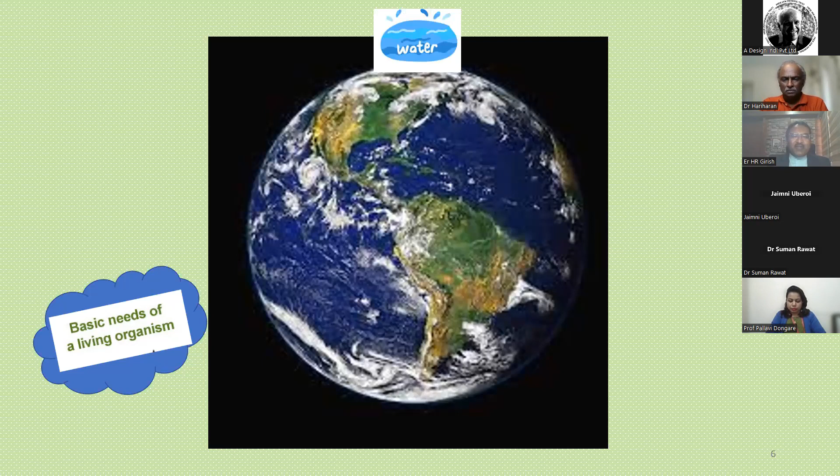And the very first thing on earth is water, sunlight, and then air. And then we have food which we require and the temperature. Now, if you look at all these things, these are not some very generic points that I'm making. Everything that we are doing today is having a humongous impact on every other thing. It may be on the temperature, it may be on the food, it may be on the air, it may be on the water. And when I say sunlight, the various layers above us in the atmosphere, it may be ozone, which we are very well familiar with, or other layers.

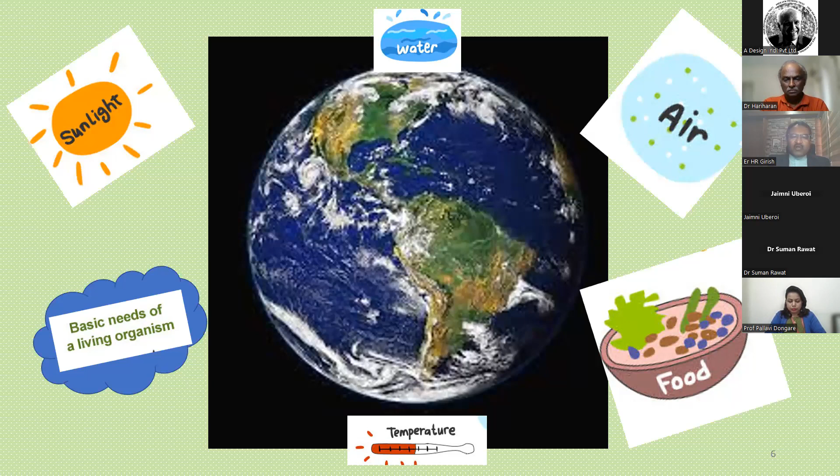So each and every aspect that made Earth what it is, and what made Earth so very possible to have life on it, is again the conditions where it is neither too hot nor too cold. It has water and air, and most importantly, it has got the right chemical composition, one of them being the carbon content. And then of course the magnetic field, which we are yet to deep dive into to the extent we have deep dived on the other three aspects.

So why we are talking of, again, not too hot and not too cold, or water and air, is today whatever distress that you're seeing all around us in the air, it may be triggering the COP, or it may be triggering the discussion on sustainability or going green, the eco-friendly method of construction. All this has already started impacting us.

And in fact, you will be really surprised to see youngsters being plagued by carcinogenic material, leading to, unfortunately, diseases or serious health hazards like cancer and things like that, which hitherto was never known in the last many centuries at that age group. Perhaps you ultimately start wondering whether all of these have got a very strong sutra, a chain, which is linked to one another. And therefore, we cannot keep looking at situations today in isolation. We have to be looking at it in a very holistic manner.

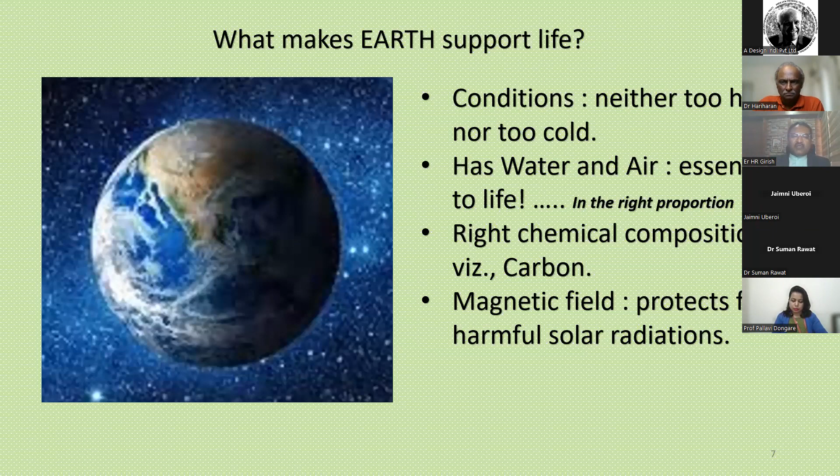So very holistic that you break far away from your professional or technological information or data that you have, into very micro nature aspects, such as the way of life, your thought process, your basic questions as to who are we, why are we. So these are not some philosophy, these are not some religious aspects. Everything is ordained in a particular manner, which is impacting today the life around us. And there are a lot of evidences which I'll show you of why this is happening.

And as I told you, it took billions of years and life began. But then I'll not be surprised with the rapid depletion of the quality of life threatening us. Even the basic fundamental requirements such as food and water and air are also becoming so very scarce.

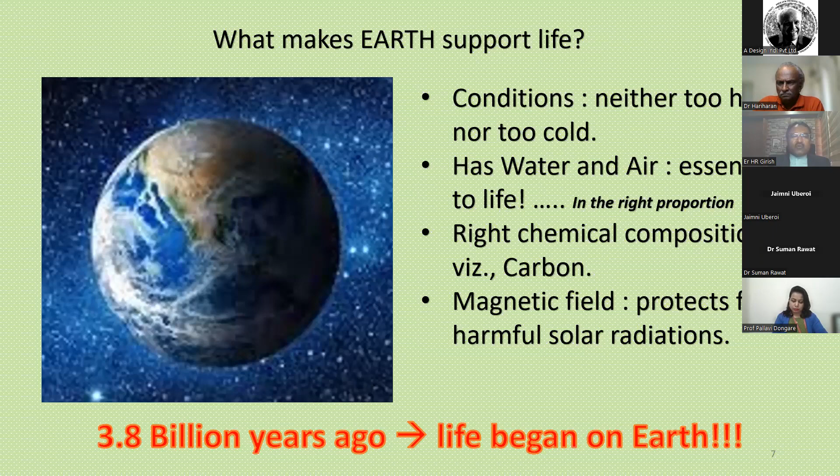Now, coming back very quickly, we all need to understand that it's not that Earth is like a huge sponge and it goes on absorbing whatever you do. Earth is extremely dynamic, extremely sensitive, and the most important aspects of our planet are that the atmosphere, the oceans, the ice and life are ever changing, changing by the hour, changing by the day, changing by the week.

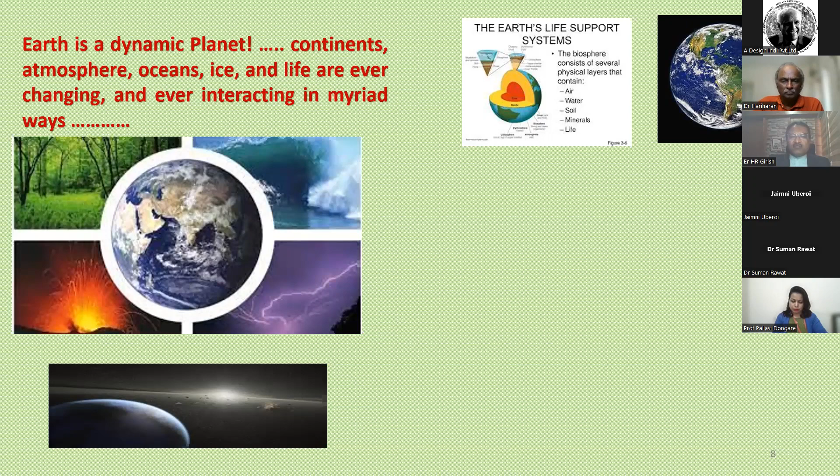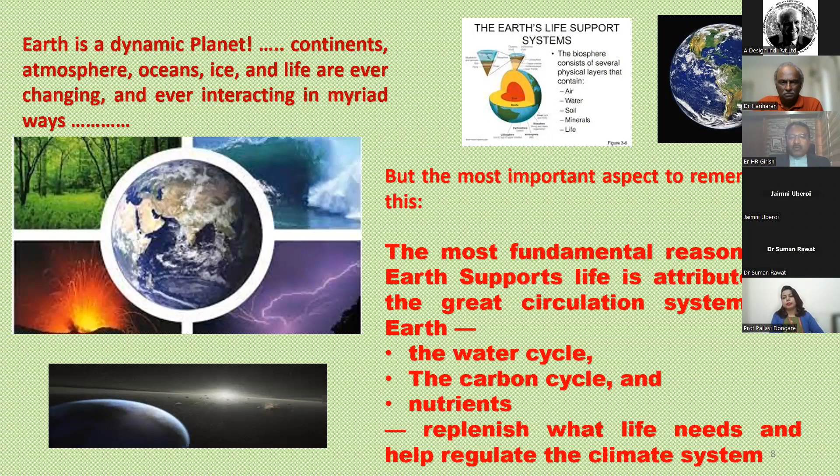And let's see why these are changing and how man-made things are adding to this further depletion. Now, the most important, as I told you, are the three cycles: the water cycle, the carbon cycle, and most importantly, how you go about to replenish life and help regulate the climate system.

If you go deep back, the concept of sustainability - what I keep doing in this particular talk is I keep toggling and drifting between various concepts, so kindly bear with me, but hold on to certain points which I say.

Even way back when you look up to the Indus Valley civilization, also known as the Harappan civilization - apart from the nostalgia and awe it creates, more closer to us as architects and engineers, the awe it creates is that this was such a holistically planned settlement. At the very prime importance that they started off, even before the concept was blooming, was the concept of sustainability.

And how do I say that? Because this civilization, as documented, we don't know how far it went or how long it existed. But today we have documented cases that this civilization lasted for about 5,000 to 7,000 years. But as we go across, new evidences are coming up that this civilization is perhaps multiple times older than what we think, and they lasted.

But how did they do that? How did they sustain themselves? That is very important. We need to do a lot of deep dive, a lot of research material yet to be discovered, and we need to draw parallels to what happened then - why did the civilization ultimately come to an end, or did it really come to an end? There is some missing link in the time clock of the world.

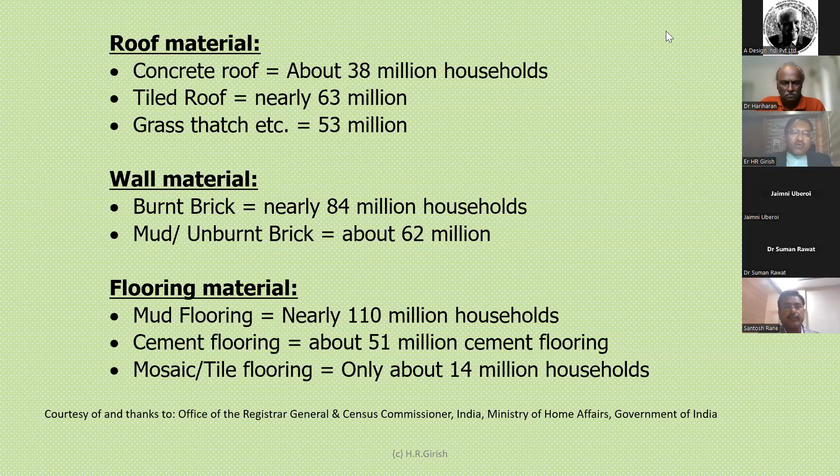And then the flooring material. The reason I'm trying to say that is, therefore, a whopping 97% are individual residences, and a huge percentage of that, again, is in rural areas. They are not in urban areas. So we need to go there.

Now, no contribution is too small, as I'm speaking. Let us all start thinking of the small things. As I told you, I'm not going to give you a ready-made formula and solution for everything. I'm just going to ignite the spark of inquisitiveness and innovativeness so that you have to take that further and pass on the baton to your next generation as well. So every drop of contribution matters in intent, in action, and leadership is very important, because leadership doesn't mind your designation. You're a general manager - it doesn't mind. Leadership is proactively taking responsibility and executing that and accomplishing the task.

That is leadership. For example, let us take a real life example of leadership where some great noble person came and started something very humbly. And that example is that of Dr. Prem Jain, who took over as the chairman of IGBC in 2007. And what was done in 2007? Just a minuscule 13 million square feet of green footprint. Just 10 years fast forward, he has been so very much in the front, in the lead, that he converted that into a whopping 5.7 billion square feet of green footprint.

Just imagine if one dedicated individual can do that. All of us collectively, all of us today in this world of technology, with so much information that we have, and with such a proactive environment, especially the government that we have, how much more we can go today, and therefore make that change and leave behind a legacy.

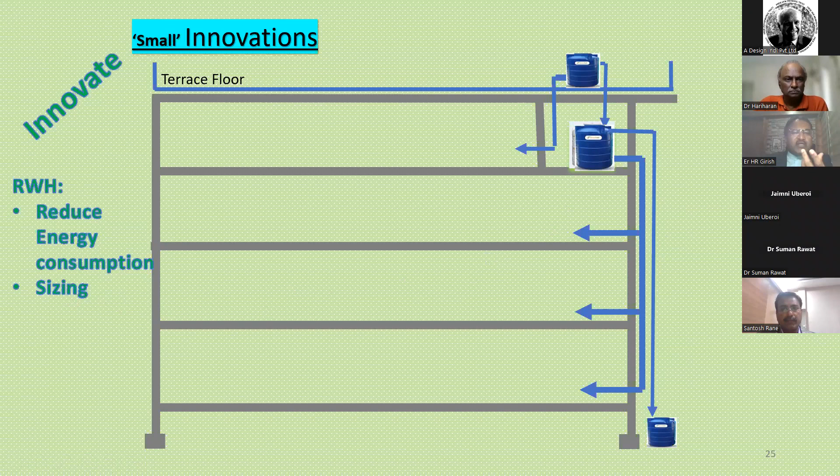You can create a small space of 5 feet by 5 feet - that's all it takes. But make sure you are structurally designing that. You should be very sure of that. I'll tell you why structural design by a professional is so very important.

Now, again, on the driveways, we keep talking of rainwater harvesting. Please use technology, please use porous concrete. And when I say porous concrete, I'm not just referring to cement concrete - it can be a myriad of concrete, recycled block, where they are not structurally a prime requirement. Please do not use prime material from the original source. Please reuse the material - for example, on your driveways, whatever waste you have, try to endeavor towards a zero waste project, zero waste site, so that it percolates down.

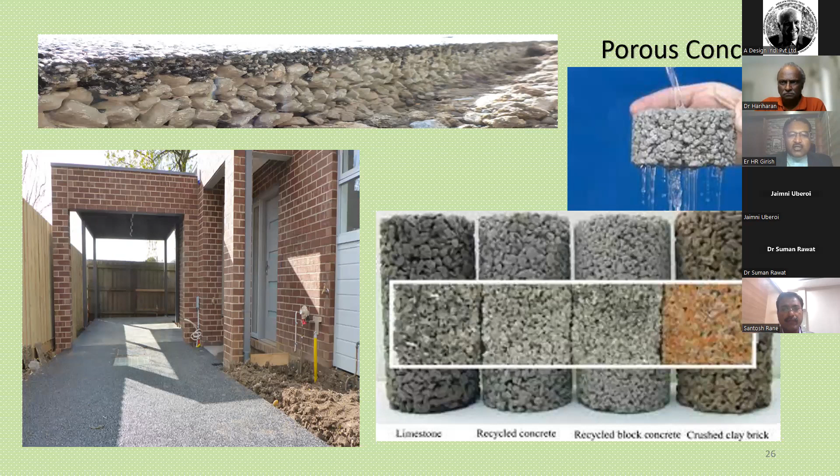And always think out of the box. That is very important. I'll give you another small example. There was a very brilliant young Indian engineer who worked on a NASA project where Neil Armstrong was sent. As you all know, one of the most critical life support equipment in a space capsule is the oxygen generator. But our brilliant young engineer from India placed a Sansevieria plant in the cabin for oxygen generation during orbit. He said this was our contribution to the first flight to the moon. Of course, he got awarded at the Minnesota University, and this is the plant.

And you know who this young engineer is who did this? Think of the very small thing - he is none other than the brilliant Dr. Prem Jain. He did that. The point I'm trying to make is don't look at him as just a legend - look at what he did, small things, just a small potted plant going there. This is where we need to think. We need to leverage that.

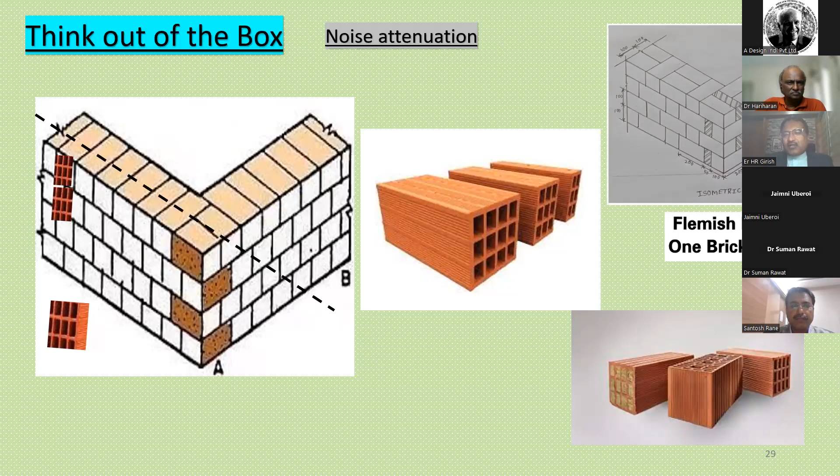Now, again, thinking out of the box and some points to ponder: the furniture, lean-to furniture or something, and try to use re-engineered wood. For example, this table that I'm sitting at does not have any legs because it's all folded. It's all foldable types. And I have purposely made my office in such a small place, though I could have afforded more, in order to experiment and see whether it will really work. And I'm really happy to say that it more than works, my productivity has gone up hugely because everything is within arm's reach.

Which means to say I've used less material. I've recycled the material. Even the table that I'm sitting at is not a table I have bought. In some apartment which I owned, I was redoing it. I had a lot of waste pieces of particle board, plywood and all. I never threw them away. I brought them, re-engineered them and did everything out of them. The point that I'm trying to say is that it's not so much about what I did.

It's so much about what we all can do. Lean-to furniture: take off the 2 legs and let the wall support it. Use hinges, let the wall support it, and let the other 2 legs be the support to it. And likewise, the smart movable wardrobes and storages.

There is a certain young smart couple who have moved into a plot. They have bought a plot, but they came back and told me, we do not want a big house. You know what they have done? They have just 3 capsules. One capsule is the kitchen. The other capsule is the bedroom. That's it. And then they've got a wash area, the toilet.

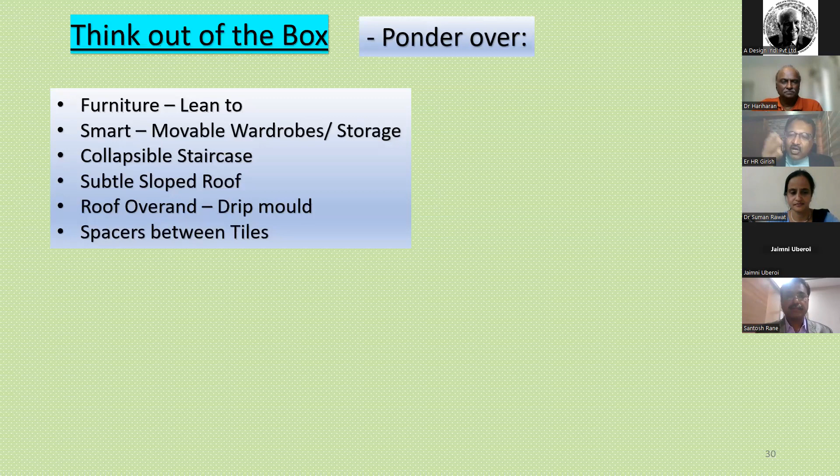And that's why please provide spacers. It will help you to inspect, and in case need be, you will not damage the tile. You will just remove that particular grout material and redo the grouting. Why should you not damage the tile? Because tile is extremely expensive from an environmental point of view. It is fired to such a high extent to get that gloss. It is mined from materials which are not occurring commonly. So these things are important.

So consider material of construction, recycled wood, steel, and the decking sheet also. In fact, I'm drawing a parallel so that you believe me: the roof of my house does not have 1 kilogram of reinforcement steel. It is just decking sheet. Normally the tensile stress is taken by the reinforcement steel, right? But here, the deck is taking the entire tensile stress.

And on that, I just went in for nominal weld mesh reinforcement, not for strength, just to arrest the shrinkage cracks. And it's all GGBS concrete. I've gone to the extent of 40% of cement being replaced by GGBS. And I am confident, and I could do it because I'm an engineer. It's like a doctor taking a drug that he knows works. Likewise, all of us should be that.

And most importantly, mindfulness is very important. Frugal, less is more, all those things converge on what? They converge on mindfulness. Solid waste generated, you can see, 11 billion tons. And every month, every week, we try to experiment on this. We do not get this readily in the market.

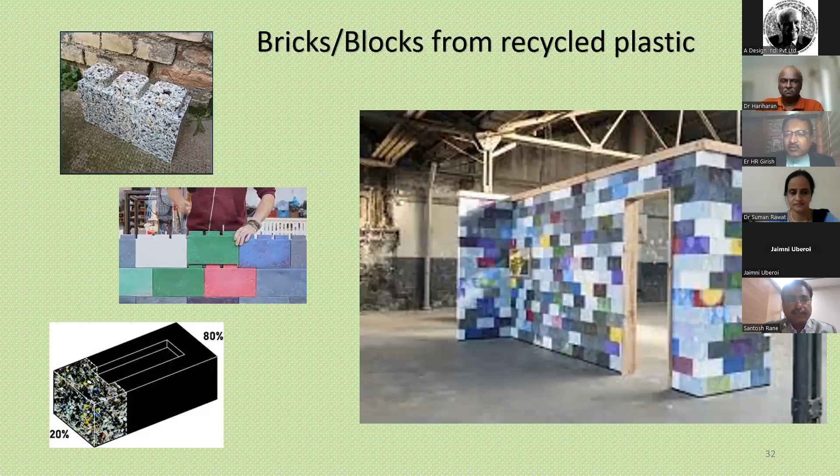And that's why I said in the first slide, all of us should be inventors, innovators, designers, and more importantly, applicators. If we don't do it, don't expect the vendor to come and give this. Don't expect the vendor to do it. Look at all this mass.

And urbanization is the major cause of sustainability being compromised. The more the people, the more compromise happens. That's where the population also should be reduced to the extent possible. All these places will now be converted, and it leads to a lot of greenhouse issues. And when we design, we need to be a little bit centric to the health of the people. Now I'll go a little bit more on to the sustainable alternatives.

Hariharan sir, how much more time do we have?

Another 3 to 5 minutes. Okay, then I have to rush. Fascinating, but time is a challenge. I'm sorry. Yes. Okay.

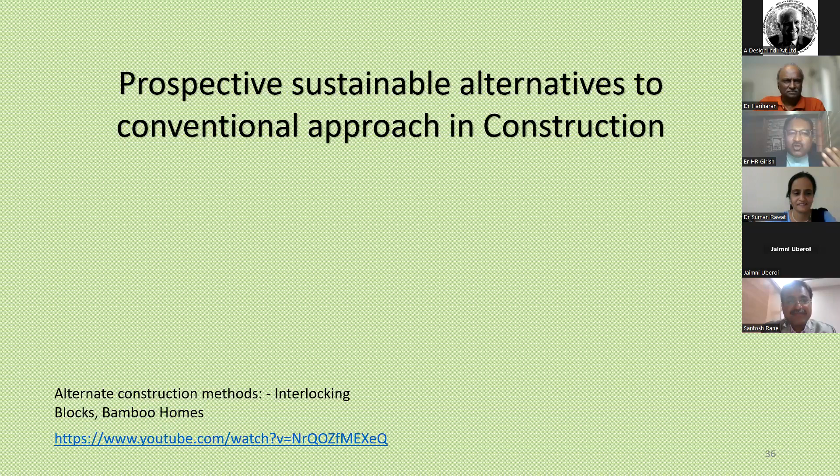Now, just going very fast, let me tell you why professionalism is so very important. I know that I can speak, I can give a lot of data, I can bring in a big, nice building which we have done out of bamboo, all those things that you can find anywhere. But I would like you to explore that small avenue in your mind which normally people don't dare to tread into. And that is professionalism versus quackery.

Case studies of buildings, and why I want to substantiate with some forensic investigations that we have made. I've been a part of some teams along with the just mentioned Mr. Engineer Girish. We did investigations across 9 projects in Karnataka which collapsed about 3 years back, taking some lives. Right from that Hubli Dharwad building. I'll just show you those buildings.

This is the Hubli Dharwad building, and you see all these innocent lives. In fact, more than 30 people are said to have perished, and all these were very innocent. One particular lady was on her way back, picking her child from the school to the house. The child asked for a chocolate. She stepped into this building to buy a chocolate from one of the stores. And then they were no more. And just see how very dramatic, how very poignant.

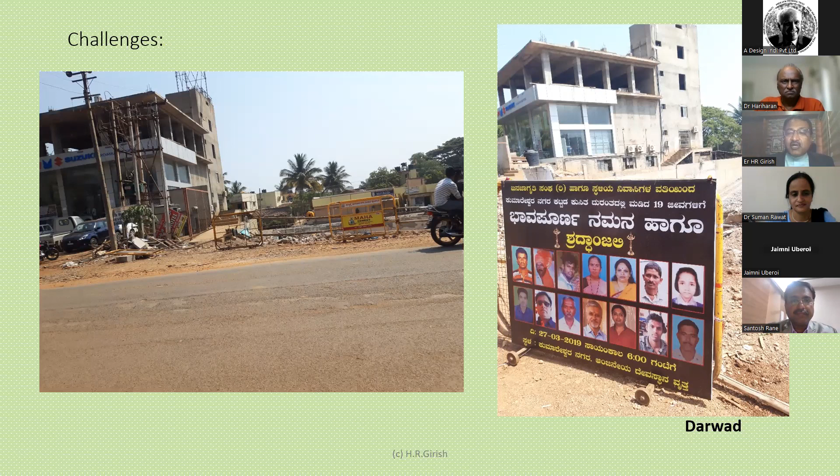And this is not a done thing. And this is not happening just because of some natural disaster. No, it is a man-made killing. It's a murder. And why it's a murder? Let's see. And look at this. We went into the intricacies; we rebuilt the entire thing back. We went into the steel and we started finding what is this material which is coming out. Oh my God. These are tendons. These are post-tension tendons. What was it doing in this building?

It's very highly technical; it requires a lot of technical information and knowledge to be putting it in a building. Who was there? Nobody was there. Somebody provided it. It's like the first time you're driving a car, you don't know what is the accelerator, what is the brake, and what is the clutch. Imagine the horrendous consequence of such a driver in a crowded place. It's like that.

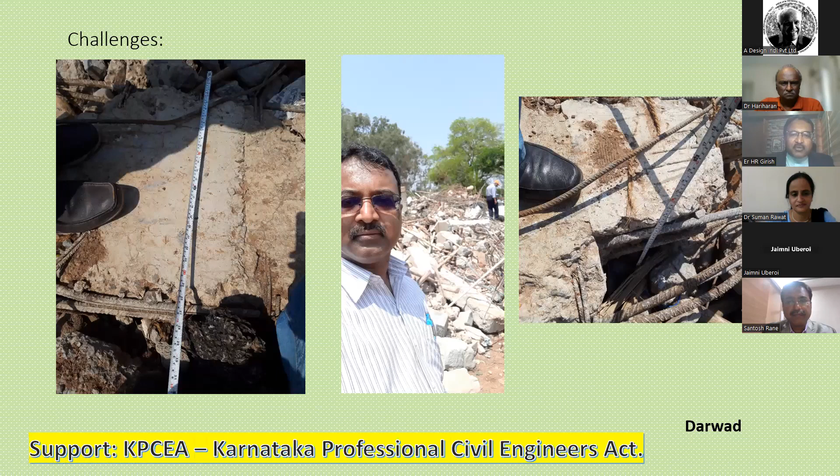And we rebuilt the entire thing. We took the dimensions, we rebuilt the entire thing to analyze what actually happened. So you can see that we are investigating there. And we also talked to the people as to how the building behaved. We took into consideration each and every aspect of how things happened.

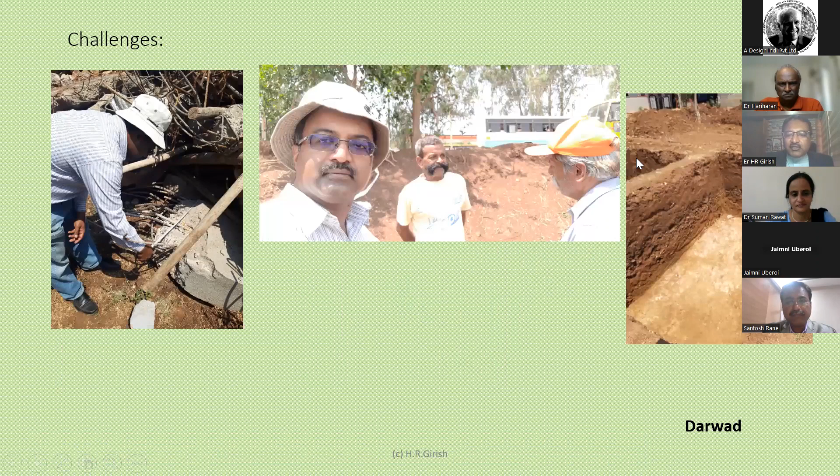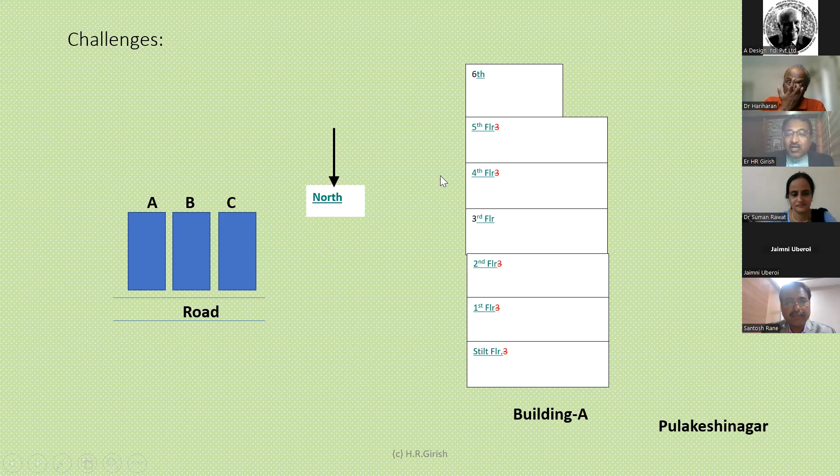Now people started asking, did you have a video camera to see that? We didn't have a video camera. But then we re-engineered and reanalyzed and started challenging our own situations. And you see this particular crack of this building having gone, hit this building, and come back. And then look at the crack which has happened here.

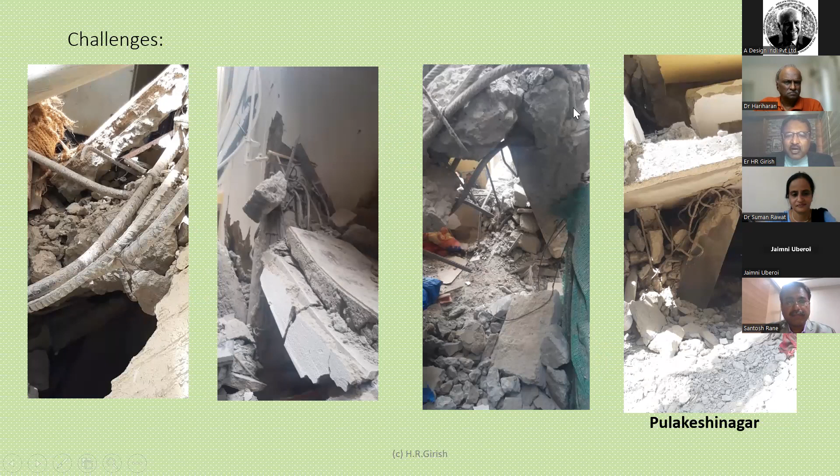And then look at this. The entire structure, this part is intact, but then it has crushed. Why has it got crushed here? And look at the impact of this. And then, if you are familiar with the IS codal provisions of steel detailing, reinforcement detailing, you will come to know. We studied every damn thing, the grade of concrete, the matrix of concrete, how it collapsed. And then you see that this particular hook is not supposed to be 90 degrees. It is supposed to be 135 degrees.

The point I'm trying to make is that you need to be a thorough professional, and only everybody who is ordained to do a job should do that job. A surgeon cannot go and fly an aircraft. A pilot cannot come and do the job of a dentist. A dentist cannot do the job of a civil engineer. Likewise, that's why we are called professionals.

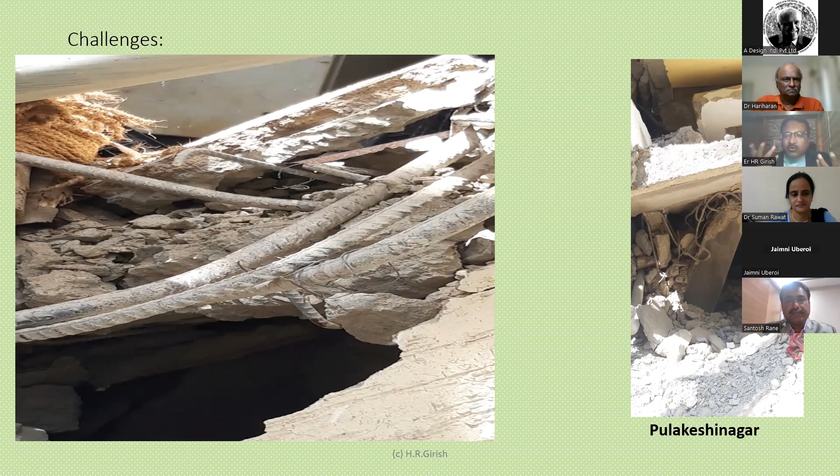Because apart from our domain of knowledge, we don't know any other thing. If I'm a civil engineer, I cannot be an astronaut because I don't know it. I know only civil engineering. If I'm a lawyer, I know law. So only those people.

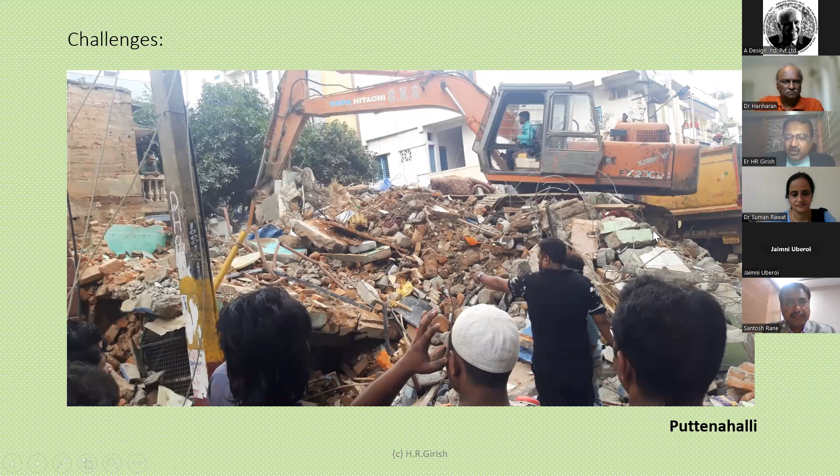And this is another particular building which we have seen. And look at this. There was a mutton stall here. And there were rodents there. They undermined the foundation, and it collapsed. And that's the reason I say ban quackery, for the simple reason that all these things will be

We are not against any other people like mestris. We want them. They are our partners. But they have to do only the job that they are ordered to do. They are fantastic in mobilizing labor, monitoring labor and managing labor. They have to do it. Without them, we can't. But the detailing part has to be given, the planning perhaps to the architect, the civil

engineering structure, and therefore please encourage professionalism, optimal approach, frugal engineering, sustainable-centric approach, and more importantly, mindfulness. And that is where there's a tremendous scope in preventive building services, structural stability, retrofitting.

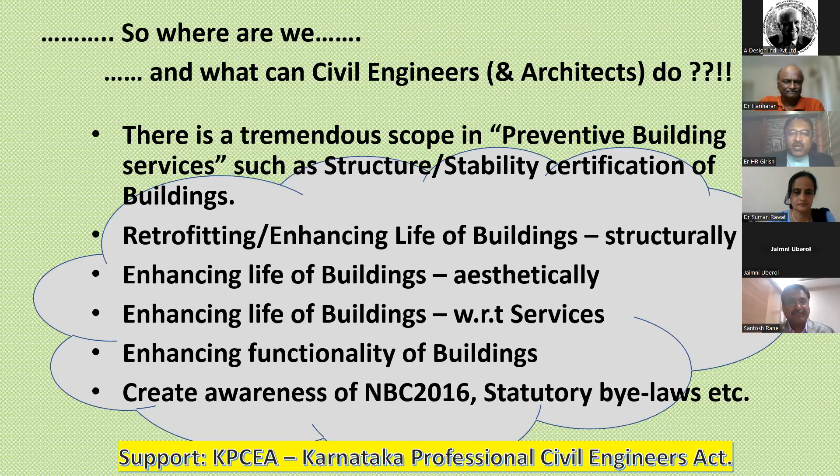And most important, I will urge all the students to please go through the National Building Code 2016. It has got a dedicated chapter on sustainability. Please read it 50 times. And at the same time, go through the administrative part, which talks about professionalism.

That's where, fortunately for architects, thanks to the foresight of the architects, you have an Architects Act. But unfortunately, the civil engineers do not have an act. And today we are moving heavily in that direction. Probably by February and March, we will table it.

And very quickly, the practice in water resources. This is the last tranche. Please make sure that you always wear your thinking caps in a public area. Instead of a bib tap, people moved to the spring-loaded tap. And instead of a spring-loaded tap, please go to a foot-operated tap.

Because when you press the knob of a spring-loaded tap, it takes about 7 to 10 seconds to come back to its normal position. But you wash your hands in 2 seconds and walk off, which means 5 seconds you're wasting very precious water. But on a foot pedal, you press it only for the time you require, and then take your foot off instinctively.

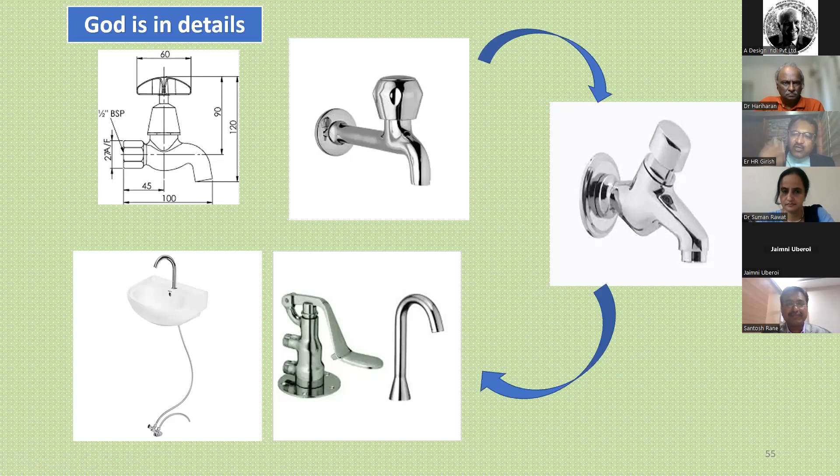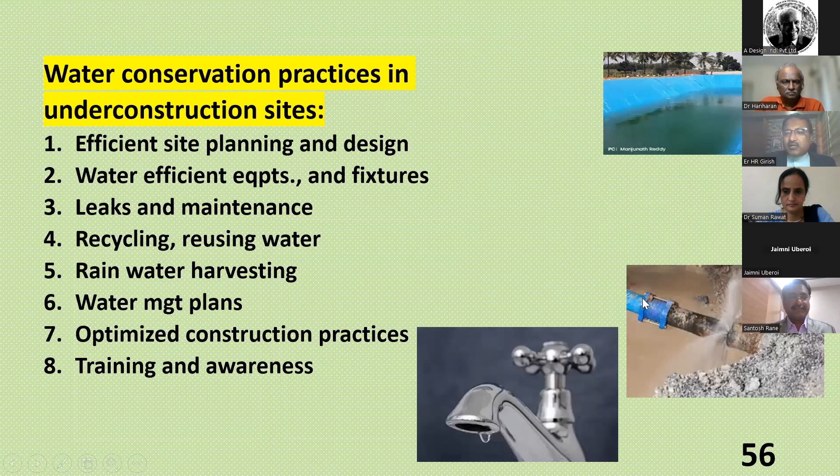And likewise, efficient site planning, water efficient equipment and fixtures, and then leaking taps are a major bane. Please pay attention to that. These are some things. Since we are pressed for time, I'll not take more on this.

And then coming on to the holistic thing, the most important thing is create infrastructure and invest in infrastructure. Each one of us, don't wait for the government to do it. In our own projects, let's do it. There are some fantastic latest conservation projects. You can go through them. Jal Shakti Abhiyan, Rajasthan Jal Swavlamban, Tamil Nadu's, all these are there on the web, including Neeru Pragati.

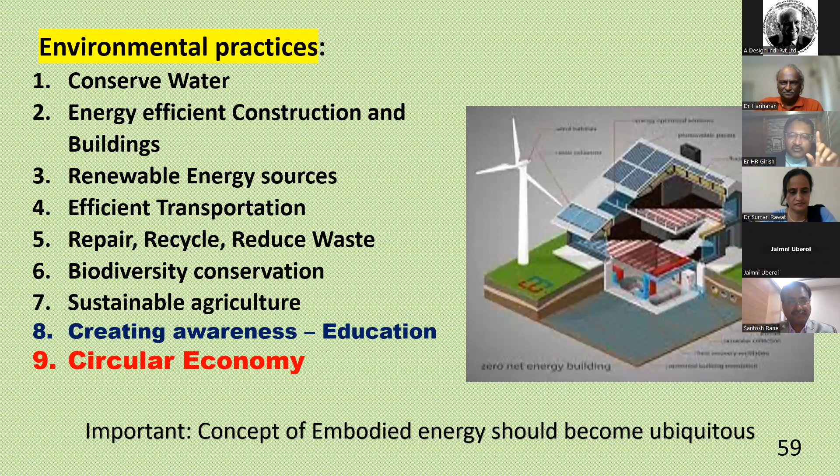Neeru Chettu project, chettu means tree in Telugu. So you've got a program in Telangana which has been highly successful. And then all the environmental practices with centricity to creating awareness amongst our own fraternity, and most importantly, the circular economy, where this concept of recyclability and sustainability is very important, with the concept of embodied energy, which should become ubiquitous.

And most importantly, awareness programs where such noble trusts, like Prem Jain Memorial Trust, are doing such a noble job, we need to create awareness with every last professional in our construction industry, civil engineering, architecture, and infrastructure. With that, I come to the end. Thank you all very much for your patient hearing.

Absolutely brilliant, Girish. This is the longest lecture. I had half a mind to tell you to stop about 15 minutes ago, but I found it so interesting, and I'm sure everybody else enjoyed it as much. I'm so sorry to overshoot my time, I'm so sorry about it.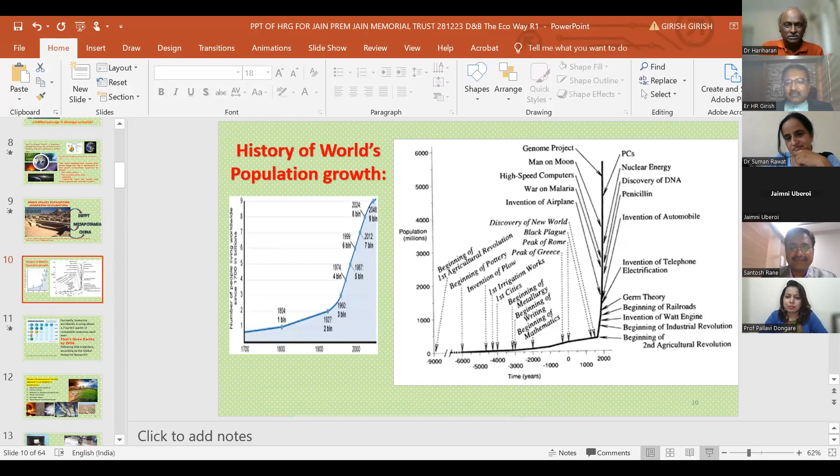Jaimni, you have to keep it muted, please.

So essentially for you, Suman, forget every other factor. Like he says, the quantum of consumption has been really disastrous for us. If you look at time from now to 2064, the world peaks at 9 billion in 2064. India peaks at 1.62 billion, 1,620 million. China is a little less than us by that time. We already are more populous than China. So now between 2064 and 2100, there are projections that show we will drop down by 1.5 billion people, and there are factors for that. I can share some of the report on that. I will leave it there.

Girish, if you want to add something very quickly before we go to Dr. Rane. Sure. Dr. Suman, basically it has to do with, as Dr. Hariharan said, the numbers. But the numbers bring with them the consumption factor, which is a major issue. Way back in 2000, did any one of us have a mobile phone? We didn't. Today, every individual has got at least 6 to 7 mobile phones. So many mobile phones have changed in the last 7 to 8 years, and each mobile phone has embodied energy that we are all keeping, and we don't know how to discard it also.